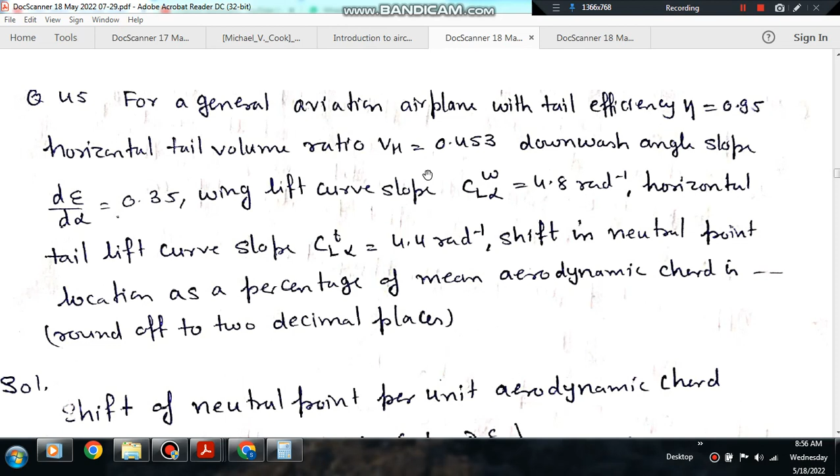Question number 45 is for a general aviation airplane with tail efficiency eta equal to 0.95, horizontal tail volume ratio VH equal to...

0.453, downwash angle slope d epsilon by d alpha equal to 0.35, wing lift curve slope CL alpha wing...

is equal to 4.8 per radian, horizontal tail lift curve slope CL alpha tail is equal to 4.4 per radian. Find the shift in neutral point location as a percentage of mean aerodynamic chord, rounded off to 2 decimal places.

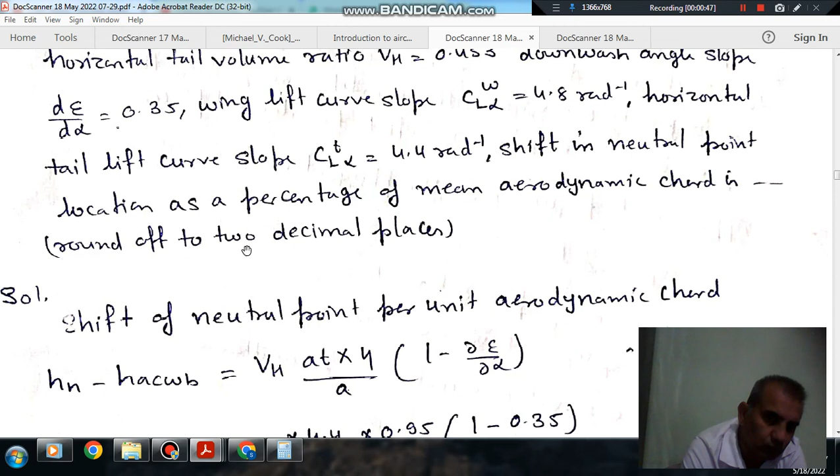Shift in neutral point per unit aerodynamic chord is given by HN, the neutral point per unit chord.

HN is location of neutral point per unit chord, and this is the aerodynamic center per unit chord.

So due to this, the shift in neutral point per unit chord is HN minus HAC of the wing body, and that is equal to VH...

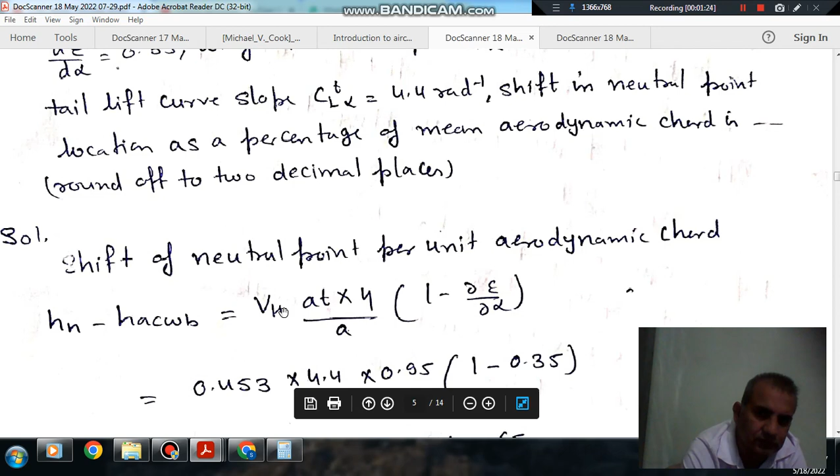VH means the horizontal tail volume ratio. AT means the tail lift curve slope, that is 4.4 per radian.

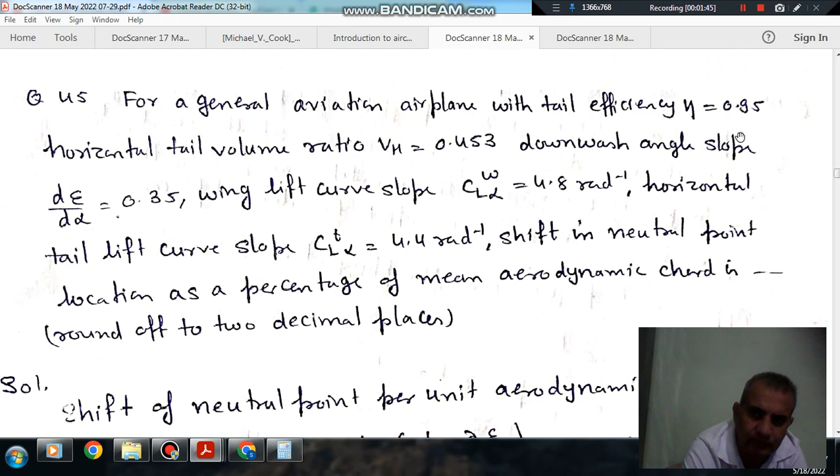A means wing body lift curve slope, 4.8 per radian, and eta is the tail efficiency.

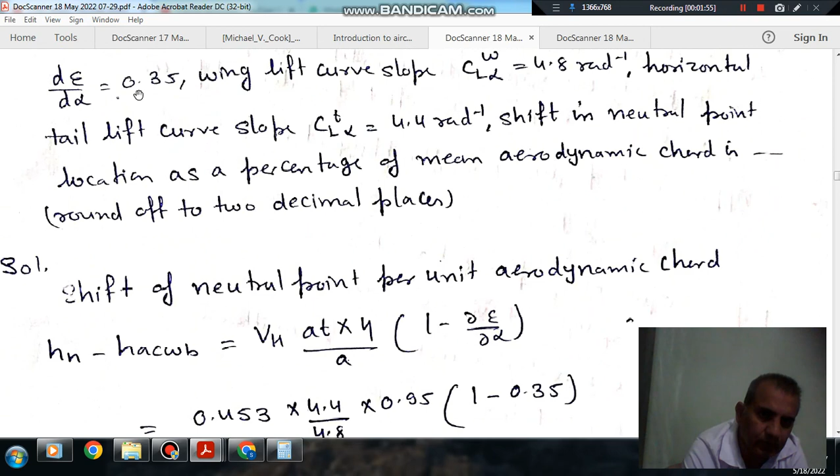Epsilon by alpha is the downwash slope, the downwash angle slope, and that is 0.35.

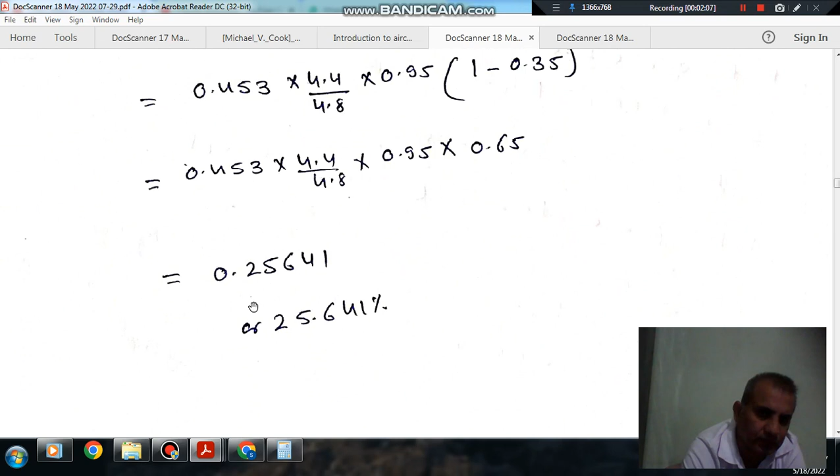Putting these values we get HN minus HAC wing body as 0.25641, or 25.641%.

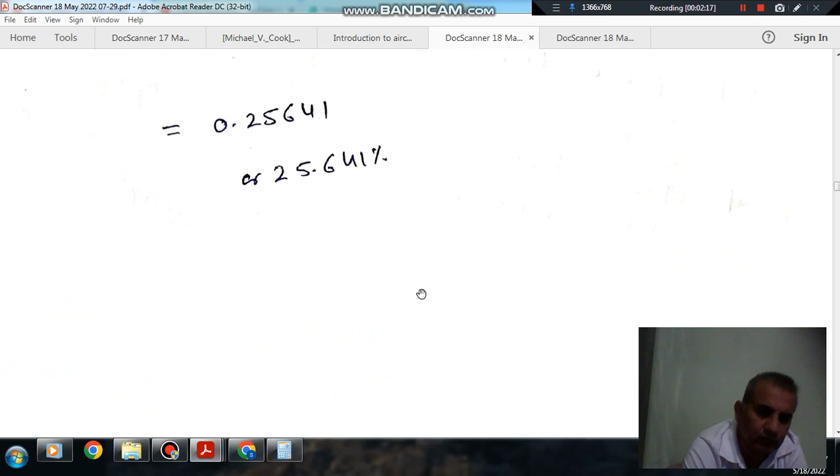So that is 25.641%. Next, question number 46.

A single engine propeller driven general aviation airplane is flying in cruise at sea level condition. Density of air at sea level is 1.225 kilogram per meter cube, with speed to cover the maximum range.

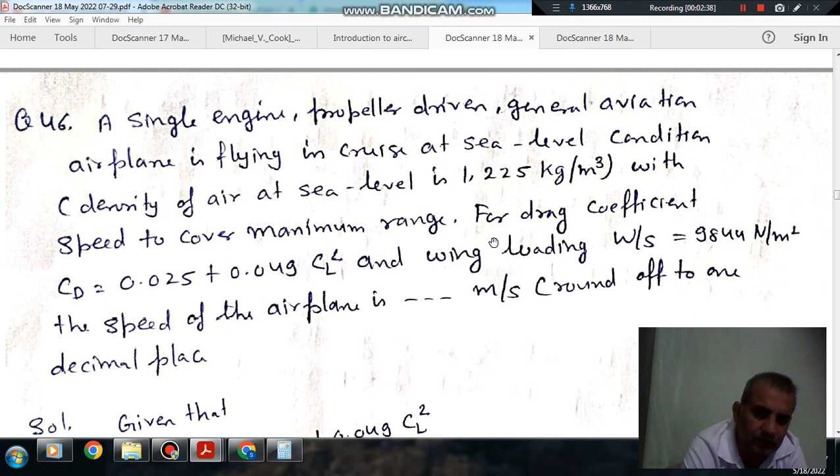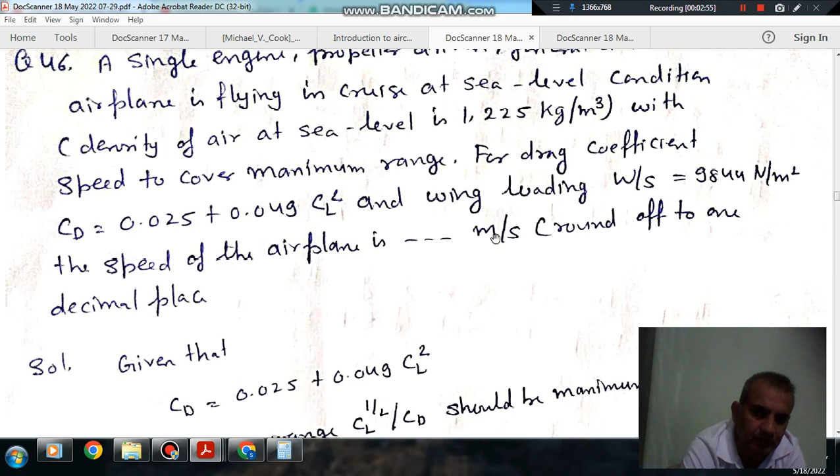Drag coefficient CD is equal to 0.025 plus 0.049 CL square, and wing loading W by S is equal to 9844 Newton per meter square. The speed of the airplane in meters per second is to be found, rounded off to 1 decimal place.

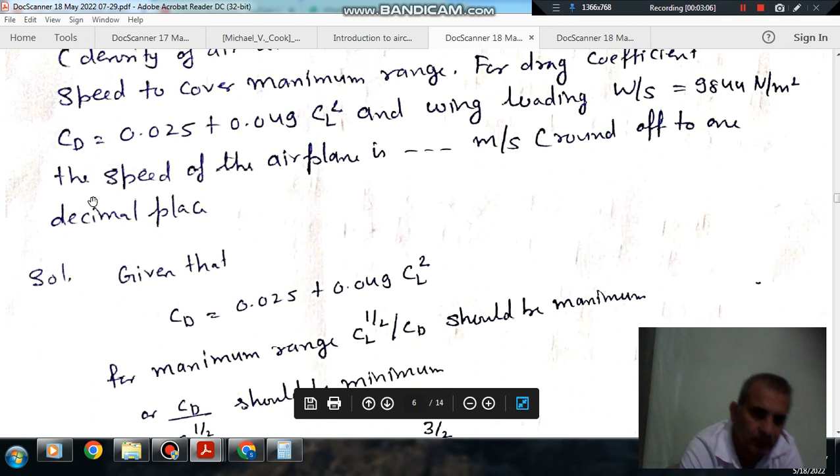So CD is equal to 0.025 plus 0.049 CL square. And for maximum range, we have that CL to the power 1 by 2, divided by CD, should be maximum.

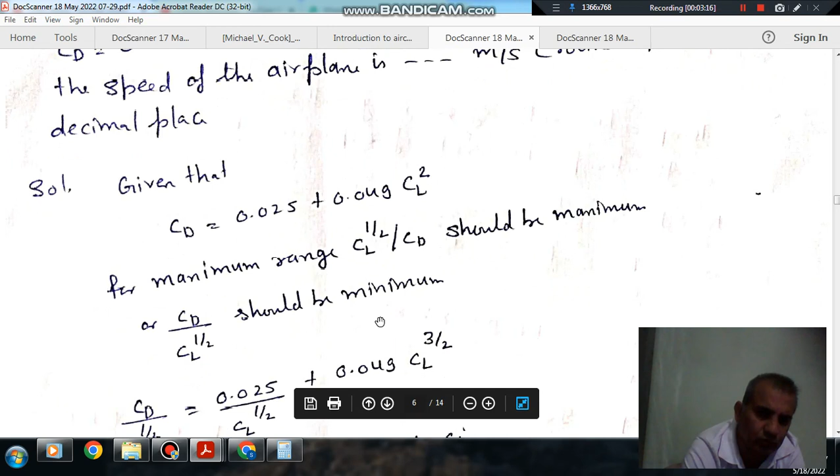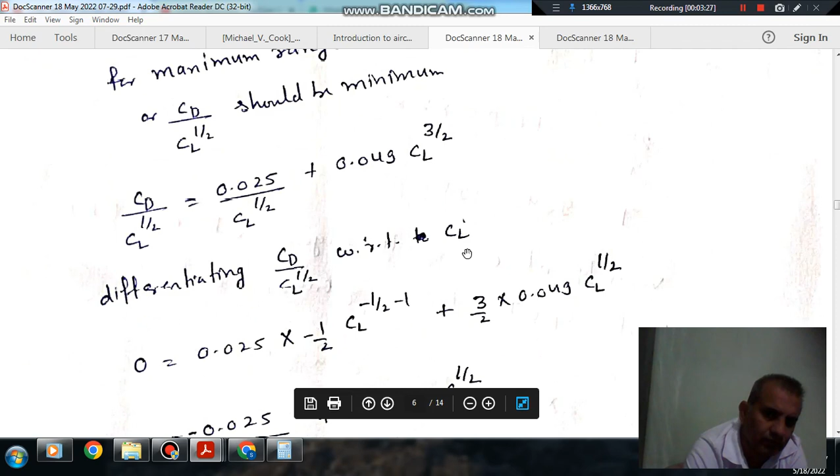Or CD by CL to the power 1 by 2 should be minimum. This equation can be converted by dividing by CL to the power 1 by 2, then differentiating with respect to CL and setting it equal to zero.

So if we put it equal to zero, then we get CL as 0.4123.

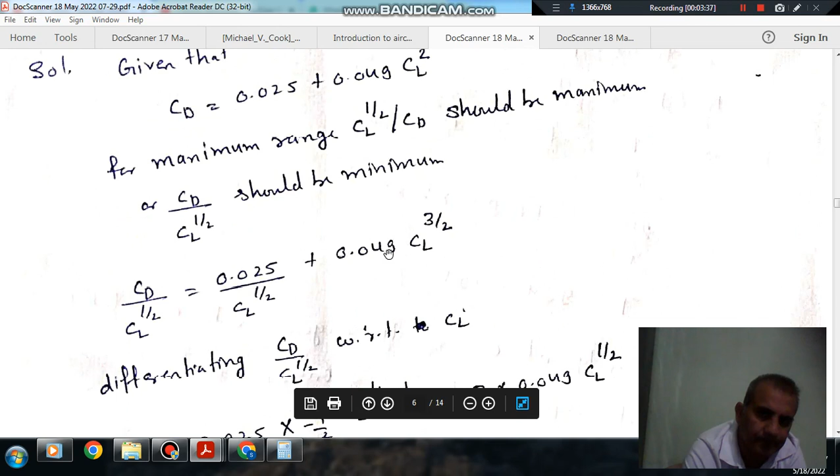0.4123. Now the speed in general is given as root of 2W by rho infinity S by CL, and CL we take corresponding to this value.

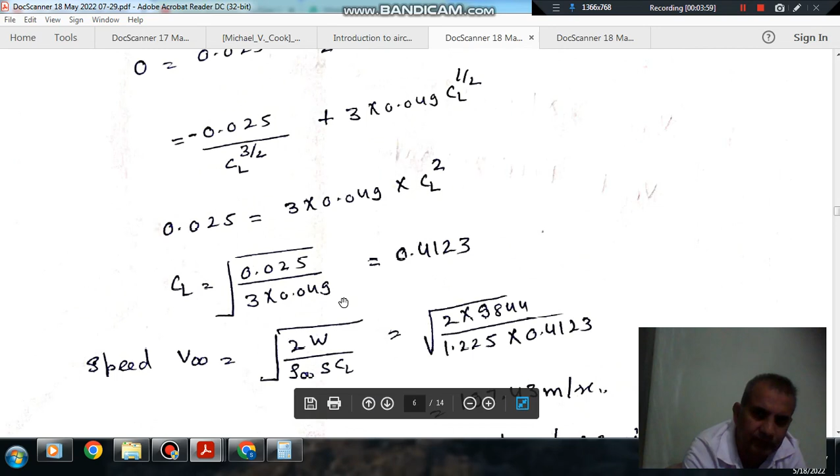And W by S is given as wing loading per unit area, that is 9844 Newton per meter square, and rho infinity is 1.225 kilogram per meter cube.

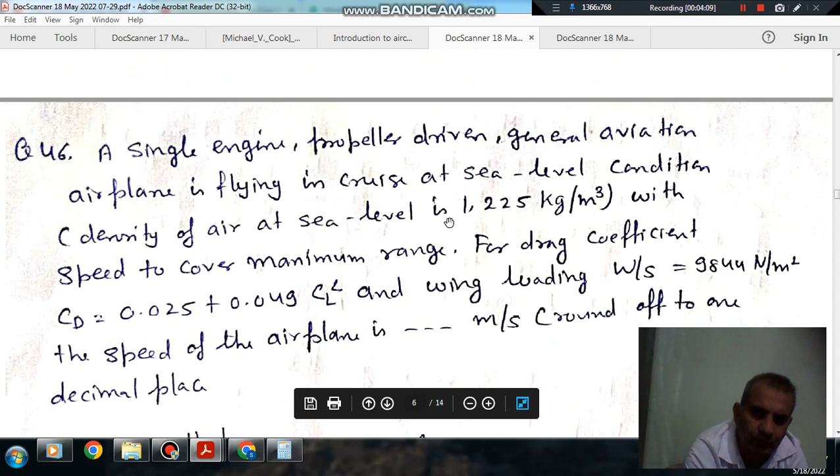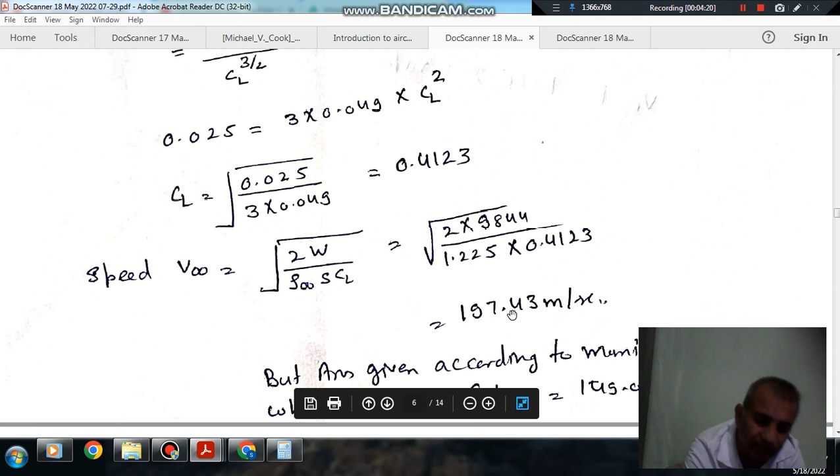Putting these values we get velocity as 197.43 meter per second, but in the answer key the answer is given as 145.0 to 151.0.

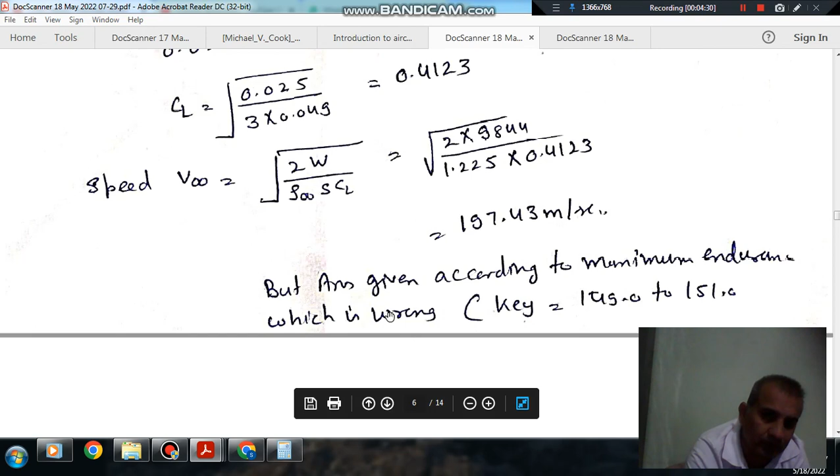So that is corresponding to maximum endurance, not maximum range. The paper has certainly gotten the wrong word here. That should be maximum endurance.

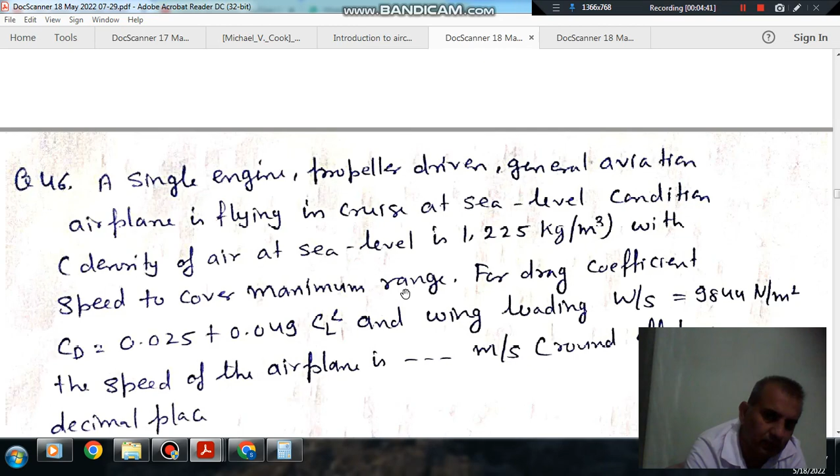For maximum range, this CL to the power 1 by 2 by CD should be maximum, and the corresponding velocity is 197.43 meter per second.

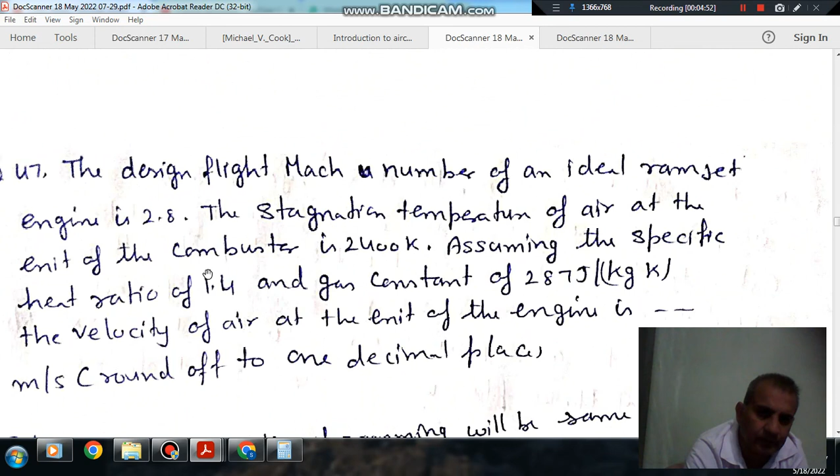Next, the design flight Mach number of an ideal ramjet engine is 2.8. The stagnation temperature of air at the exit of the combustor is...

2400 Kelvin. Assuming specific heat ratio of 1.4 and gas constant of 287 joules per kilogram per degree Kelvin.

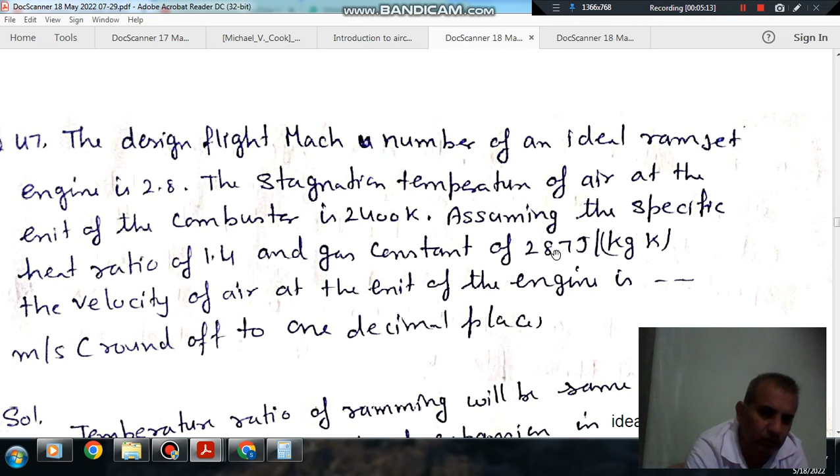The velocity of air at the exit of the engine in meters per second is to be found, rounded to 1 decimal place.

So the temperature ratio across ramming and across the nozzle should be the same if we consider isentropic expansion and the same fluid flowing in the ramming portion and the nozzle portion.

It means no fuel has been added, or the fuel added has been neglected. So the temperature ratio across ramming is given by 1 plus (gamma minus 1 by 2) M square, where M is the Mach number.

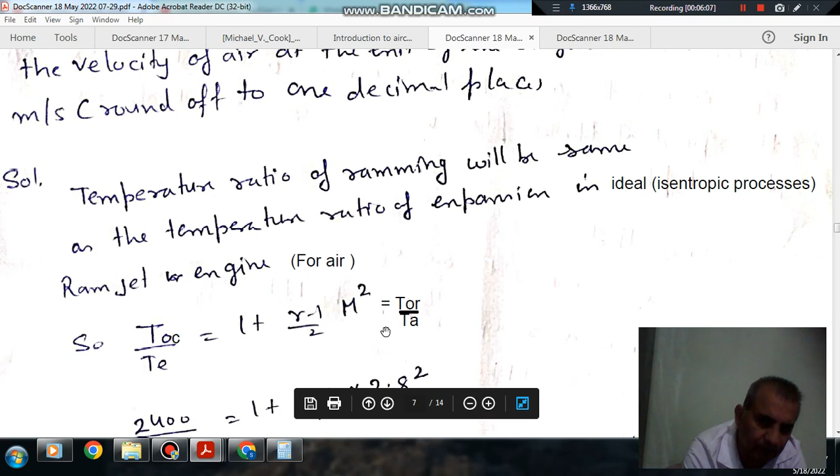And that temperature ratio equals the temperature ratio across the combustor exit to the nozzle. T0C is the stagnation temperature at the outlet of the combustor, because fuel has been added, that temperature is different.

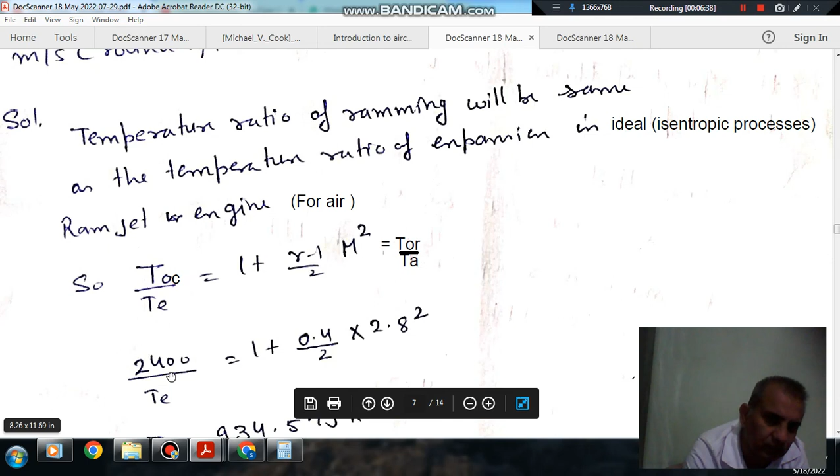Mach number is given as 2.8. From this we can get T.

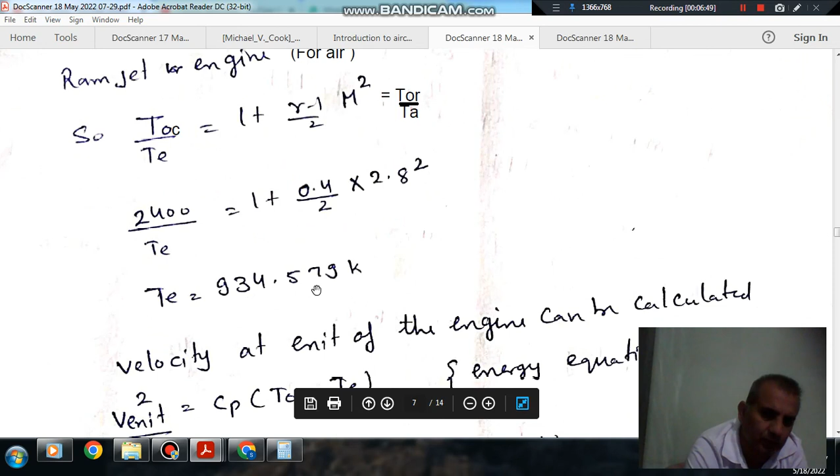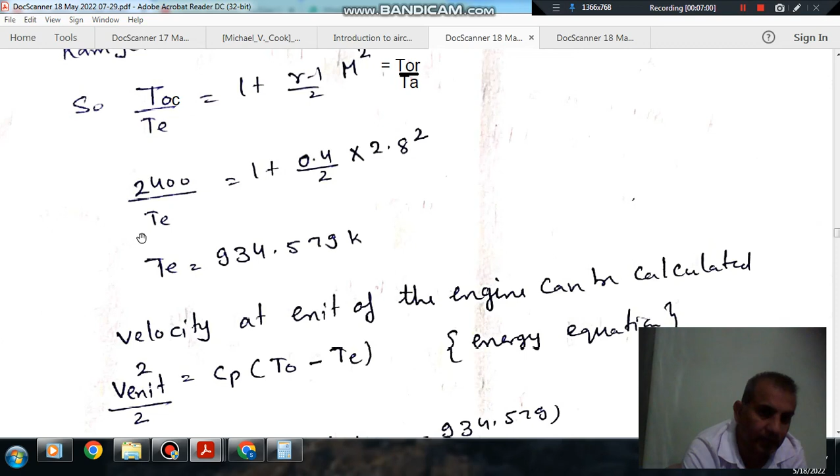934.579 Kelvin. Now we have T naught, or T naught C, the temperature at the inlet of the nozzle, and we have T, the temperature at the exit of the nozzle.

From the energy equation we can find the velocity at the exit, V square by 2 equals Cp times (T naught minus T), or putting the values of T naught, T and Cp, we can find V.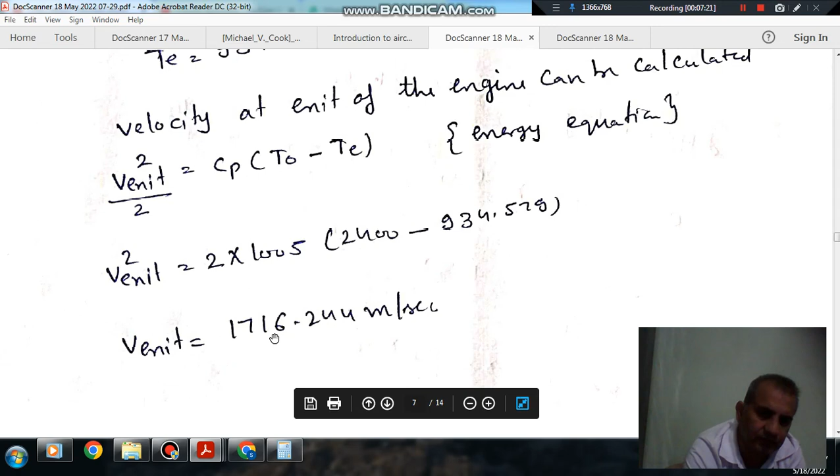That velocity is 1716.244 meter per second.

Next, the operating conditions of an aircraft combustor are as follows. The rate of total enthalpy of air entering the combustor is equal to 28.94 megajoule per second.

The rate of total enthalpy of air leaving the combustor is equal to 115.42 megajoule per second.

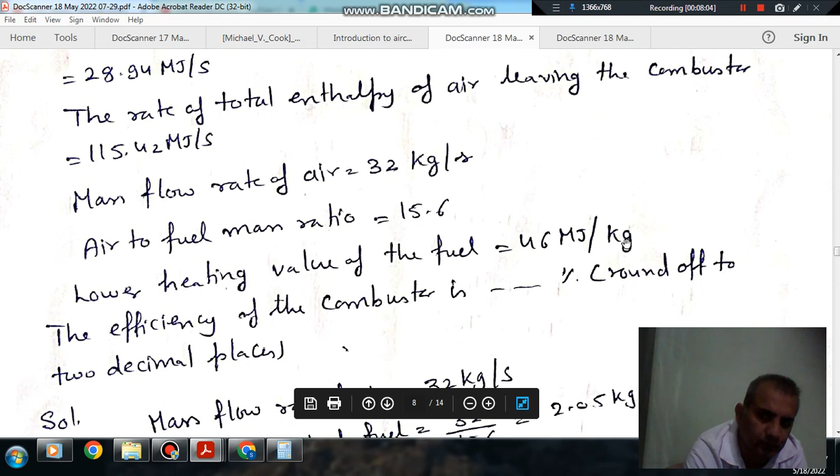Mass flow rate of air is equal to 32 kilogram per second, air to fuel mass ratio is 15.6, and lower heating value of the fuel is equal to 46 megajoule per kg. Find the efficiency of the combustor in percent, rounded to 2 decimal places.

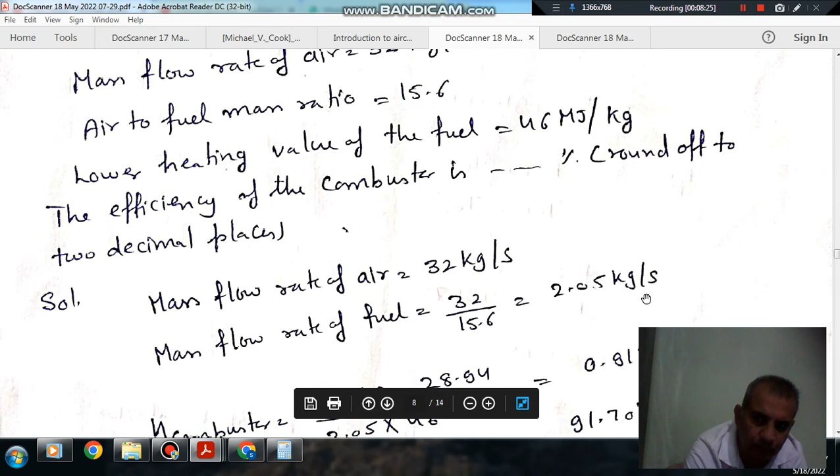So the mass flow rate of air is 32 kilogram per second, and air to fuel mass ratio is 15.6. So the mass flow rate of fuel is 32 by 15.6, that is 2.05 kilogram per second, the mass of fuel flowing per second.

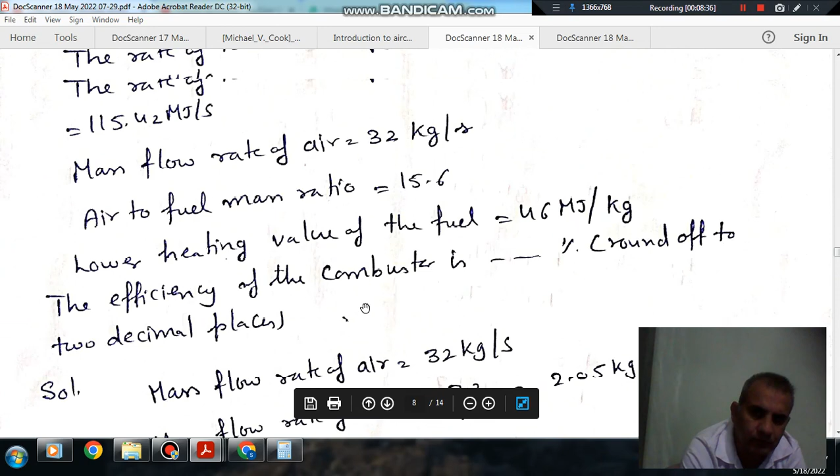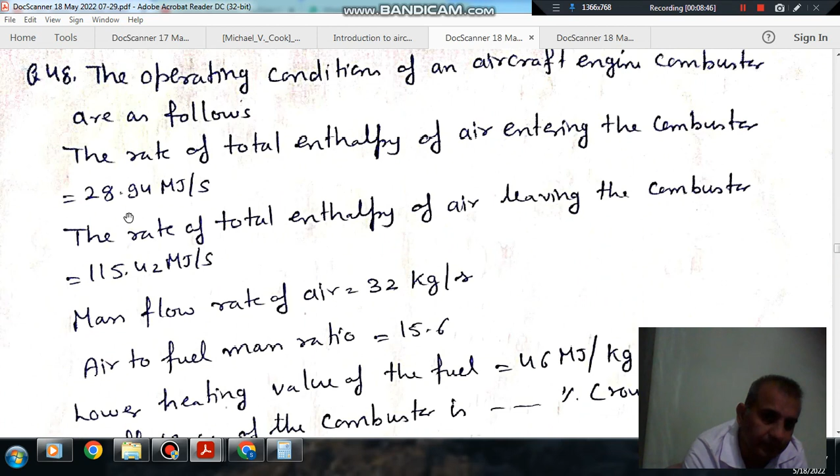Because enthalpy is the enthalpy at the exit of the combustor per second, and that is the enthalpy at the entry of the combustor per second.

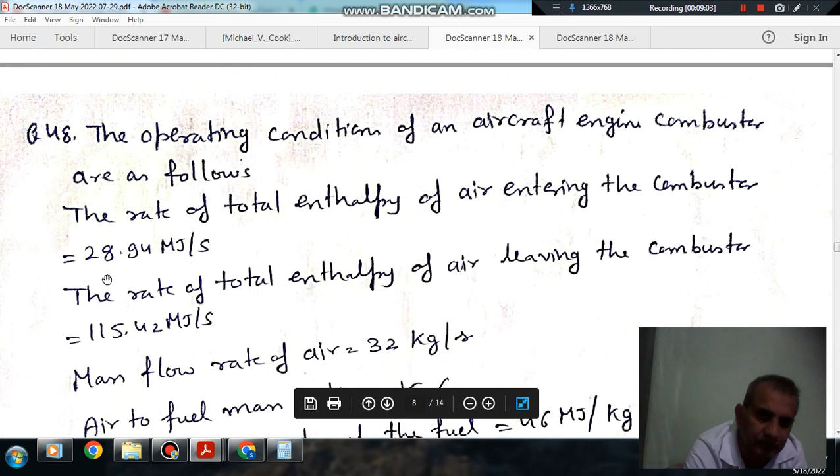So the change in enthalpy in the burning process divided by the heat supplied by the fuel. Efficiency is the change in enthalpy, this quantity, divided by heat supplied by only the fuel.

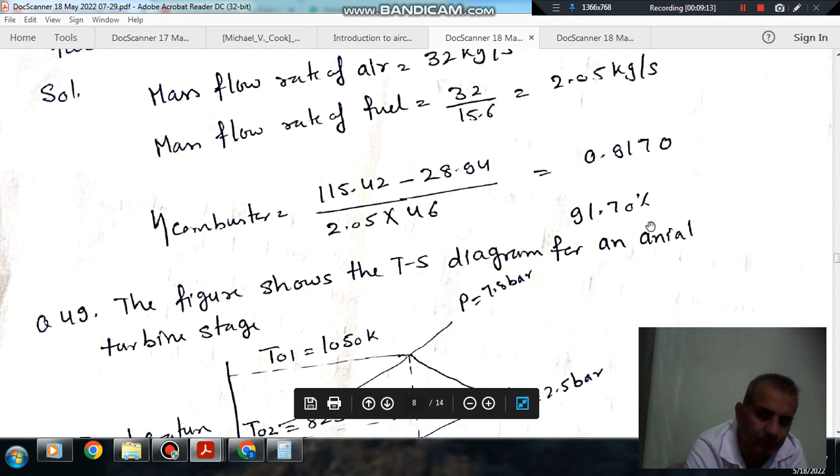That is 2.05 into 46, giving 0.9170, or 91.7%. So the answer is 91.7%.